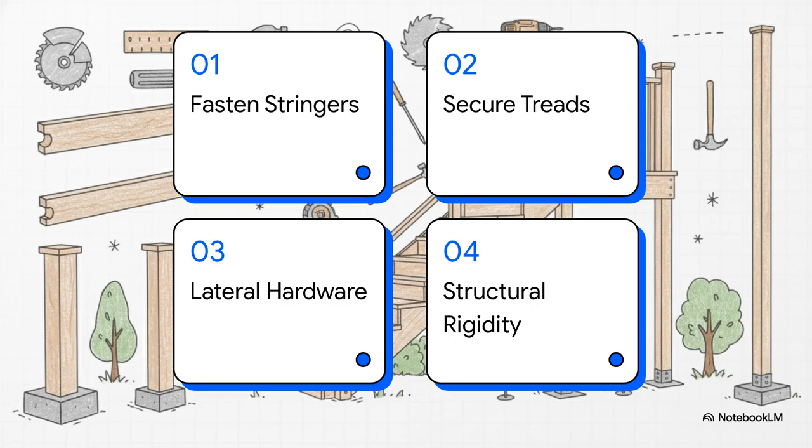Here's our mental roadmap for the build. 1. Fastening the main stringers. 2. Securing the stair treads. 3. Installing lateral hardware. And 4. Ensuring structural rigidity. Simple enough, right? But hey, before we attach a single piece of timber, we need to ground ourselves in the basic anatomy. Take a look at this breakdown.

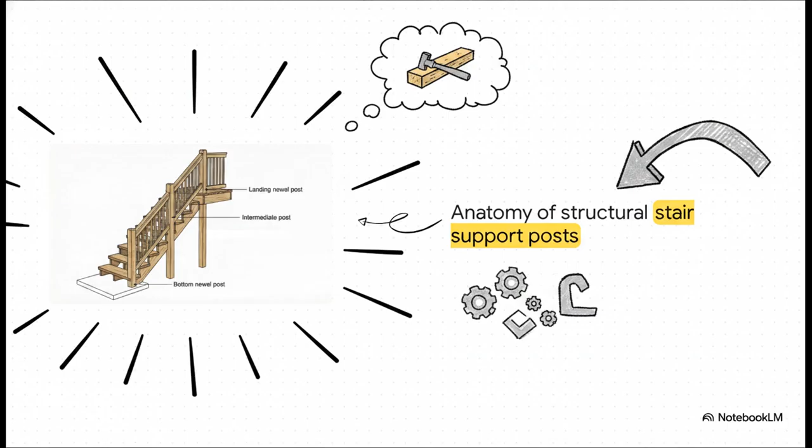Up at the top, where the stairs actually join the deck, you've got your landing newel post. Then, depending on how long your flight is, you might have an intermediate post right in the middle for that extra bit of support. And finally, down at the bottom, sitting nice and secure on the ground pad, is your bottom newel post. Knowing exactly where these posts sit is crucial, because they are literally the structural backbone we're about to attach this whole shebang to.

All right, phase 1, fastening the main stringers. This is the exact moment your project stops being a pile of wood and actually starts looking like a staircase. Securing those stringers is all about creating a permanent, heavy-duty connection between your side supports and the rest of the building. And the secret here? Sticking to a strict, unvarying sequence.

Step 1, position your stringer so it's perfectly flush with the finished floor level. Step 2, verify your line and level. You've got to make sure it's not twisting or bowing on you. Step 3, pre-drill your holes. Do not skip this or that heavy structural timber is going to split. Step 4, fix those main connections by bolting the top to the landing joist first. And step 5, tighten all your fixings until the washers are pulled just slightly into the wood, nice and snug.

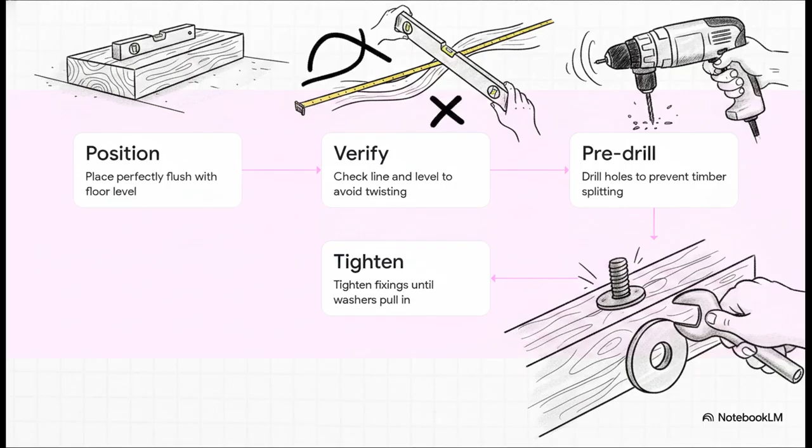Now, while you're working through those 5 steps, you have to actively manage your stability. Remember, we're dealing with timber here. It's a natural material. It likes to shift, bow, and twist while you're working with it. So you want to use temporary spreader boards nailed between the base of the stringers to hold your exact width.

Establish a really straight string line so the stairs don't end up looking cranked. Apply some diagonal bracing to stop any side-to-side sway while your concrete footings are curing. And, of course, always perform your 3-4-5 squareness checks. It's an absolute game changer for keeping things true.

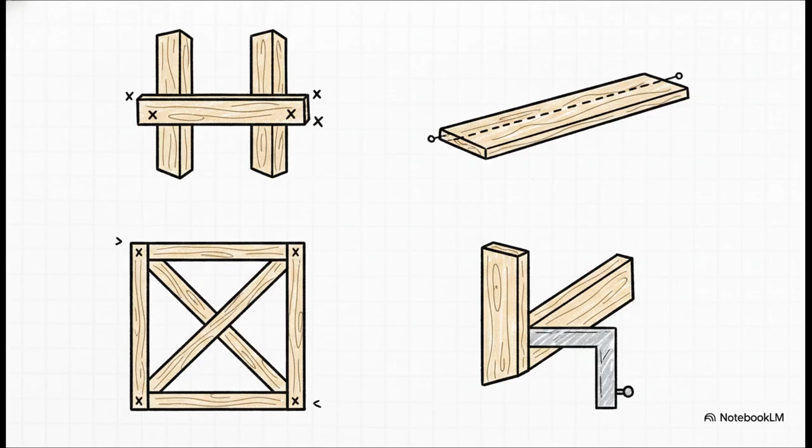Okay, with the frame locked in, we move right along to phase 2, securing the stair treads. So we're moving from the structural frame to the actual horizontal surfaces people will be walking on. And you generally have 2 ways to support these treads. On one hand, you've got your traditional housed stringers. This means cutting precise grooves, applying a good external grade construction adhesive, and driving in wedges. It's classic, it's highly effective, and it's specifically designed to kill any squeaks.

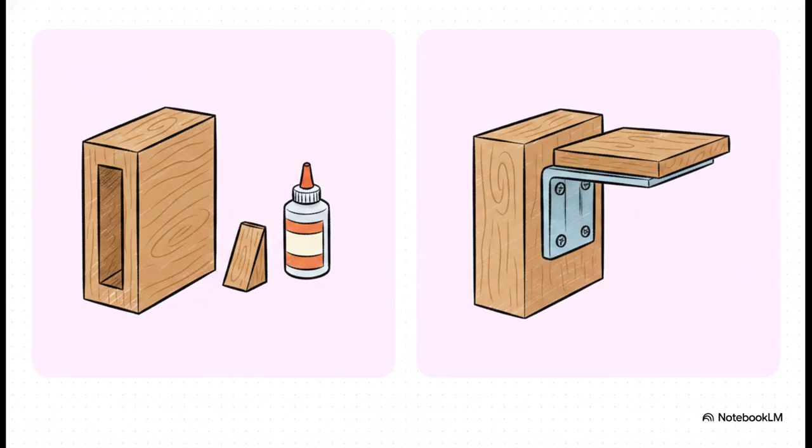On the other hand, we have modern metal brackets. This is where a metal shelf is surface mounted underneath or on the side of the tread. It's an incredibly strong alternative if you want to skip cutting all those grooves.

Now, what's really interesting here is that if you do go the modern bracket route, you can't just slap any old piece of metal on there. You've got to check for 3 very specific things. First, a thick galvanized coating so it doesn't rust out in the weather. Second, properly sized pre-drilled holes that actually match your bolts. And third, a load rating that meets the specific demands of your stair design.

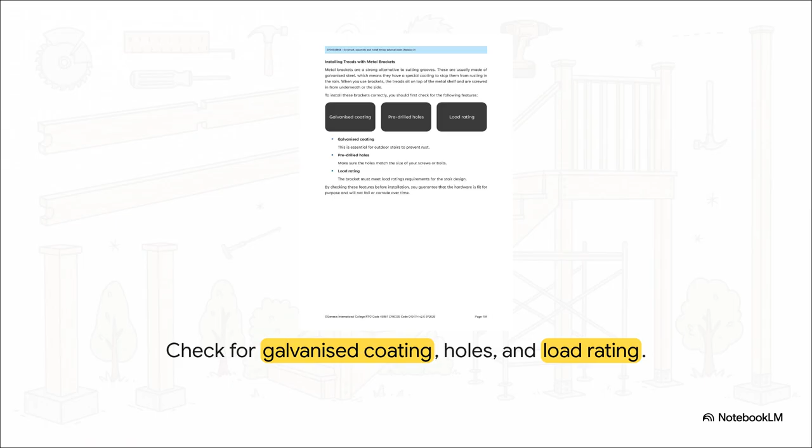Hitting these 3 points guarantees your hardware is fit for purpose and won't fail or corrode on you down the line. Moving right along to phase 3. Installing lateral hardware. Now you might be wondering, hey, why do we need extra hardware if the treads are already secured? Well, to maintain a uniform width after years of heavy foot traffic, through bolts with threaded rods provide some serious shear strength. A galvanized threaded rod that spans the entire width of the stairs literally pulls those stringers tight together, locking the treads firmly into place.

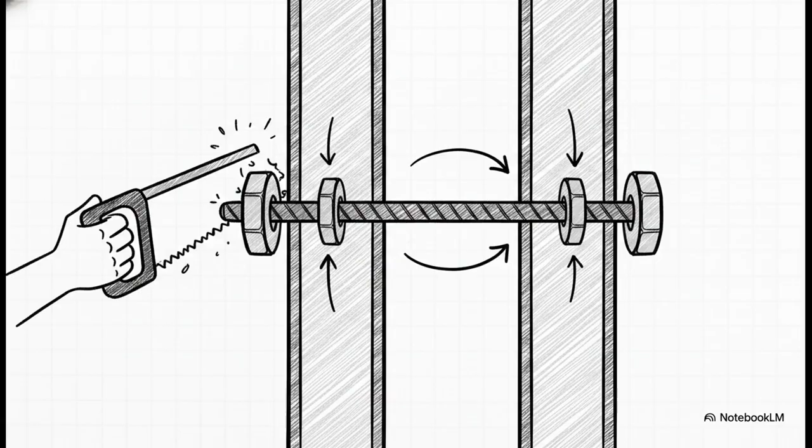This isn't just a nice to have. It's exactly what ensures your staircase meets the super strict National Construction Code load requirements. Once it's all tightened up, you just trim off the excess rod with a hacksaw for a nice, clean finish. And finally, that brings us to phase 4, ensuring structural rigidity. Up until now, we've essentially built a really well-assembled frame. But this phase is where that loose frame officially becomes a permanent, unmoving part of the building itself.

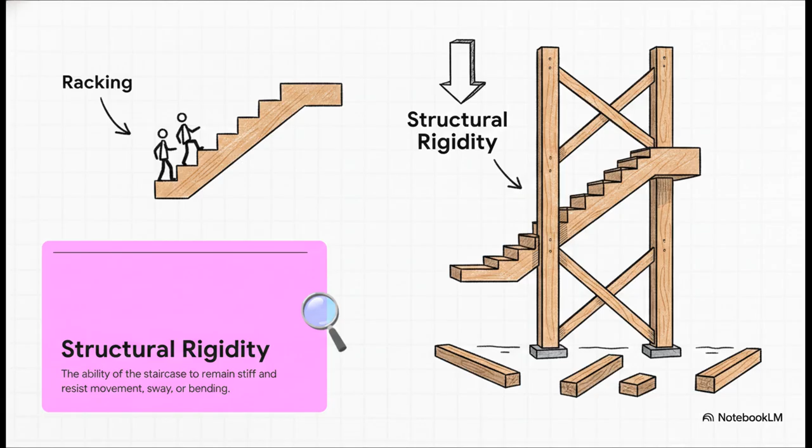Let's set the stakes here. Racking is what happens when stairs tilt sideways under the pressure of people walking up and down. We absolutely do not want that. What we are after is structural rigidity. That's the ability of the staircase to remain stiff and completely resist any movement, sway, or bending for its entire lifespan. That's the goal. To hit that ultimate level of rigidity, we follow a strict permanent anchoring sequence.

First up, position and re-verify your plumb and level against the deck ledger. Second, drill your pilot holes nice and deep into the landing joists. Third, secure the top fixings using heavy-rated structural fasteners and nice large washers. Fourth, anchor the base of the stringers, or the newel posts, to your solid, ground-level footings so the stairs don't just sink into the soil over time. And finally, seal up those joints. This high-strength connection right here is what stops the stairs from ever sliding away from the building.

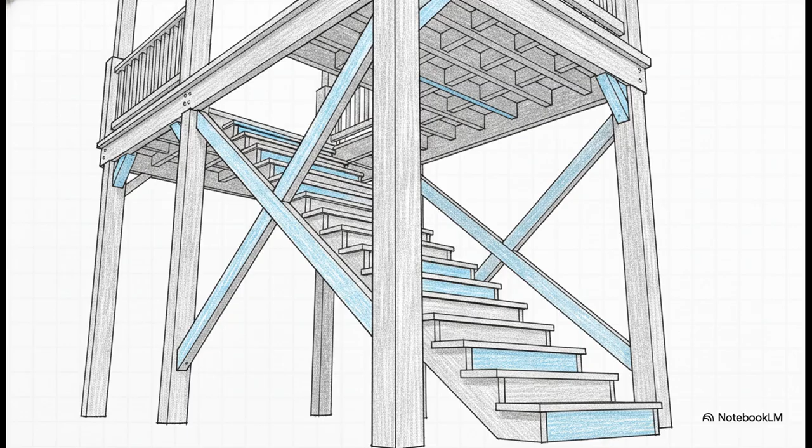But wait, even after bolting the top and bottom down, a really tall staircase might still have a little bit of side-to-side wobble. To completely eliminate that, you need to identify any areas lacking stiffness and install permanent structural supports. We're talking diagonal bracing, lateral ties, knee braces, and blocking. Honestly, these are the unsung heroes of carpentry. They are what lock in that perfect plumb alignment forever.

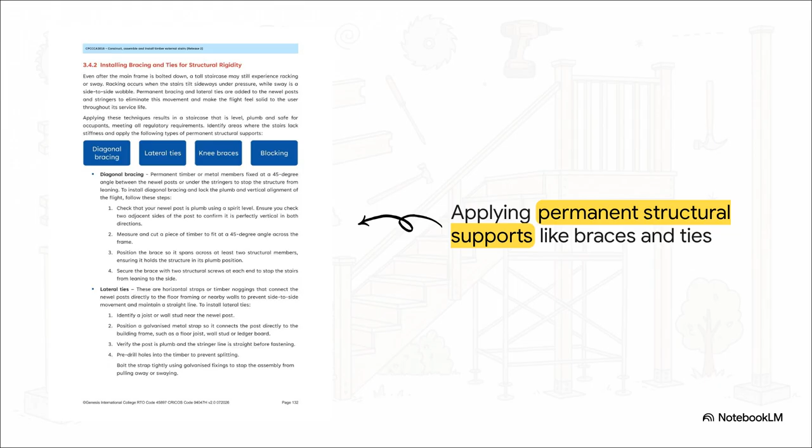And this brilliantly illustrates how you'd actually apply these on site. It's straightforward, but so critical. A piece of timber cut at a 45-degree angle acts as a diagonal brace, and you fix that right across the frame with structural screws to kill any leaning. Alternatively, you could use a lateral tie, which is basically a horizontal galvanized strap, and bolt it directly from the newel post to a floor joist. That will strictly prevent any side-to-side movement.

So as we wrap up this explainer, I want to leave you with something to really chew on before your practical assessment. How could skipping just one temporary structural stability check, like, say, forgetting to use a spreader board or skipping a quick plumb check, compromise your entire perfectly cut stair layout over time? Remember, all those perfect cuts only matter if the final assembly is rigid. Keep that in mind, never cut corners on your bracing, and trust the sequence.